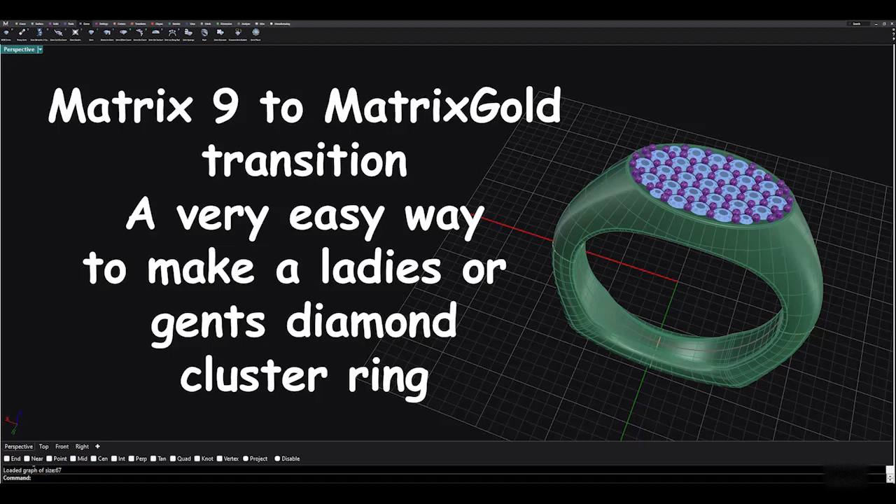Okay, here we are back inside MatrixGold.

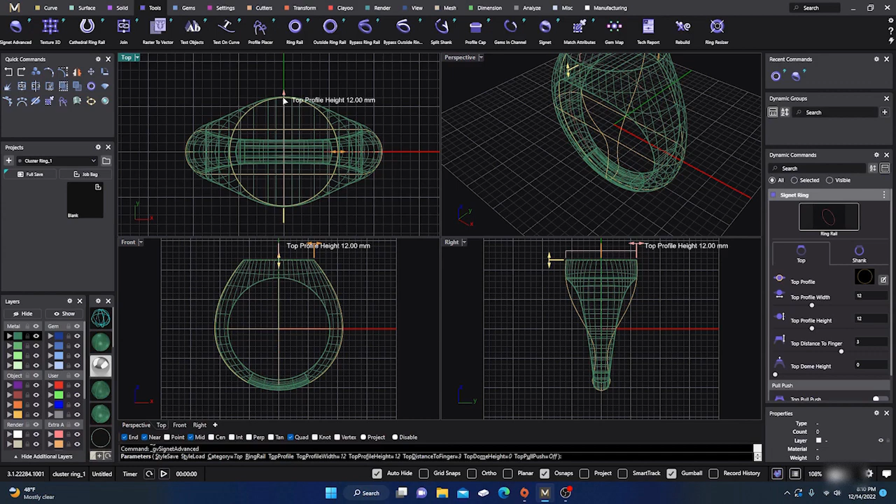So we're going to show how to make a cluster pave ring, ladies', so we'll go ahead and get started. We'll go to our tools, grab our ring rail, hit enter, and then we'll just go here to our signet ring. And for a lady, we're going to make it elongated with the finger. So we'll do something like this here.

So it's kind of going against the finger. They kind of like that thing. And we'll go to our shank and we'll bump that up holding down shift to 2.5, and we'll take this one to 2.5 as well. Maybe. There we go. Alright, so here we got this shape.

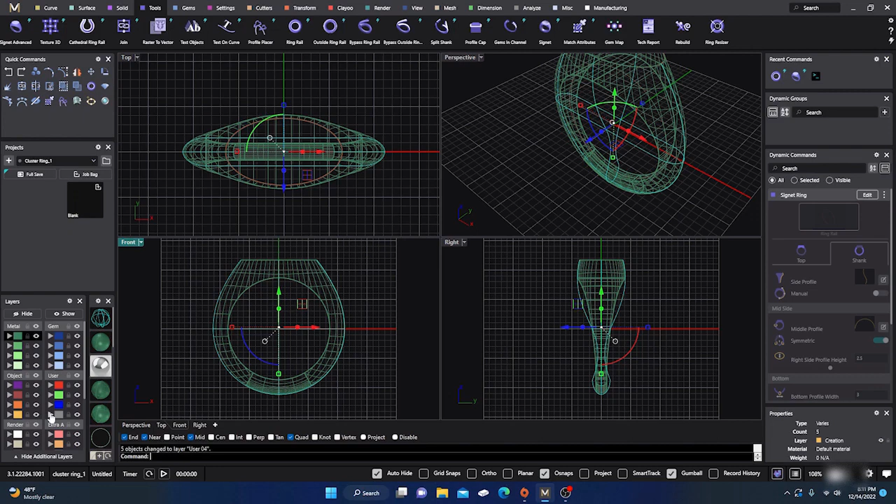Now I'm going to take my yellow right away, and I'm just going to take most of my yellow. I'm going to change this one to red, and then I'm going to take all my yellow, put it on gray, and hide it. Okay, so we have this. Alright, so let's give it some shading.

The first thing I'm going to do is go ahead and go to my solids, and well, actually there's two ways to do it. I'll do the real easy way first. We have our shape here, right? And we want to make a little dome there, so it's a little bit easier for wear and tear. So we'll go ahead and extract the surface. We'll pick this one here and hit enter. So we have this surface extracted.

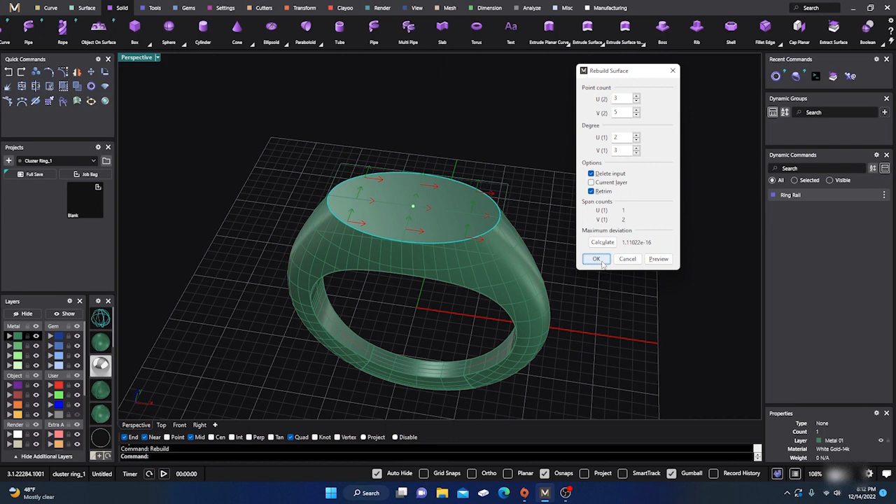Now we'll choose that surface and we'll type rebuild and hit enter, and we'll leave it degree 3, U 3 and V 5. And delete input and retrim. We'll just leave it right there, and we'll hit OK. And now we'll take that surface, turn on our points, select these points in the center holding down shift, and then drag that surface down. So now we have a little concave surface, right?

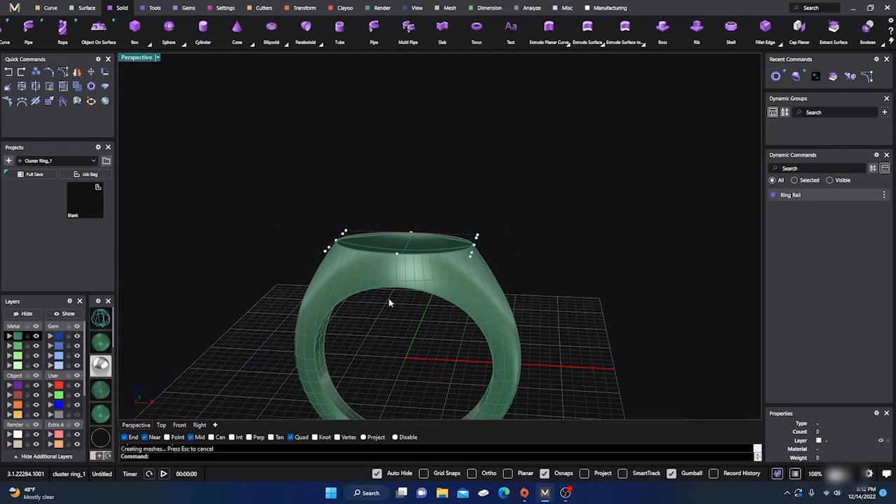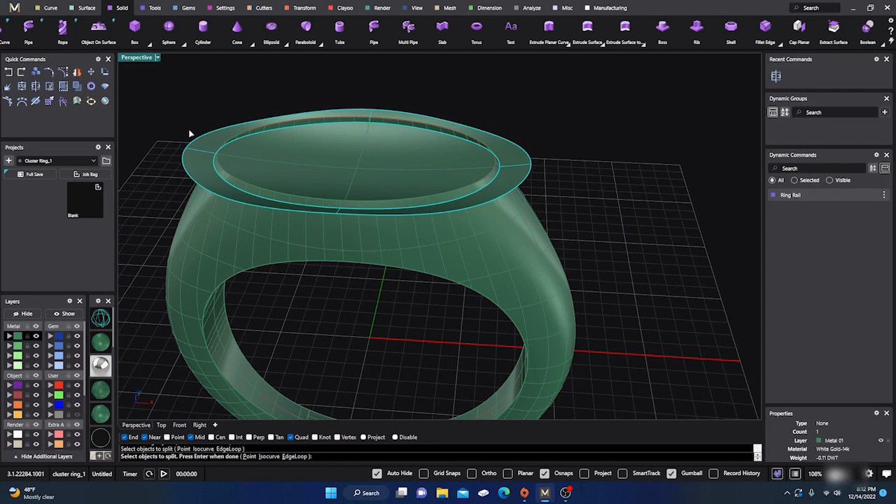This will work out really good, but there's another way we'll show you. Then you just take that surface because it pulled away, and we'll just grow it out, then grab that, do a split with our ring, hit enter, and then grab our ring and do a split with our surface there and hit enter, and then delete that, delete that. Oh. Okay, so we'll take our surface, split with this surface, hit enter. Now we should be able to delete that surface, and there we go.

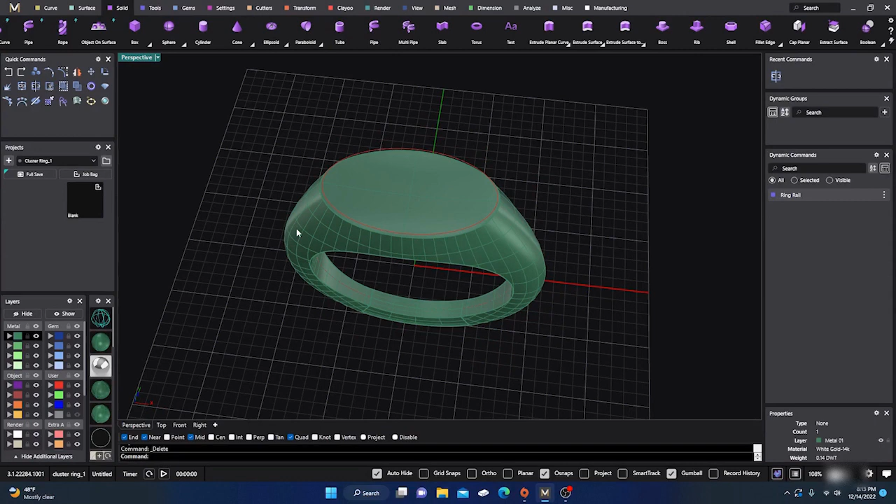So if you take all your green, join it back together again, now you have a closed polysurface with an indentation there. So that'll work, and then all you have to do is go back, extract that surface again, hit enter. And it's extracted. Let's change it to another color. Go to our top view, click on that surface, go to our gems, go to pave builder, and you can start playing around with it from here.

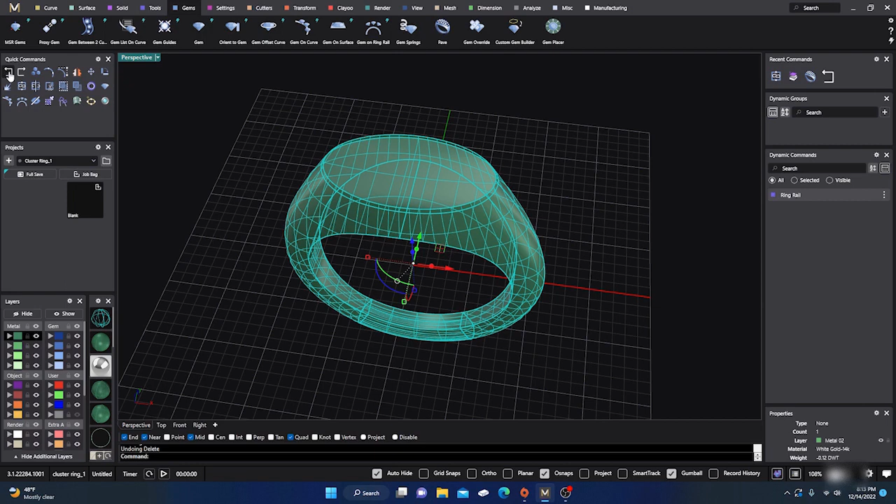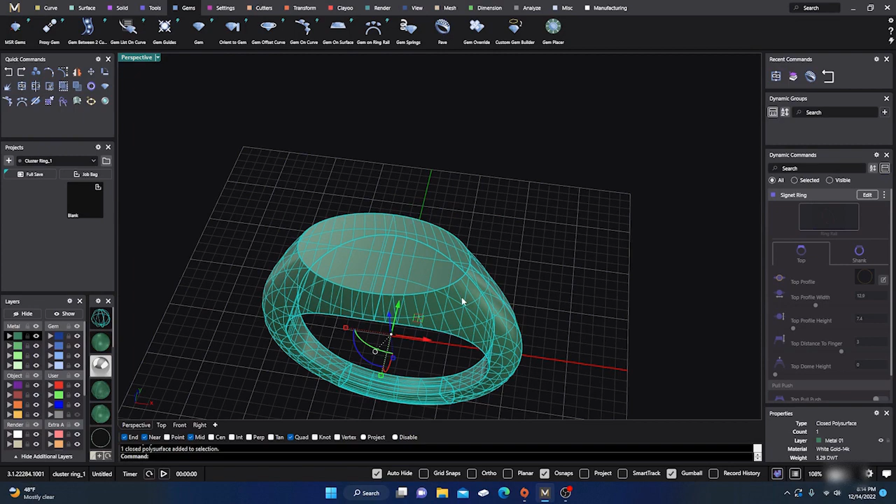But we're going to show a little bit different way as well, so you can get a different idea. So let's go back to where everything's back the way it was. Let's go back one more. Okay, and one more. So everything's joined together again. Okay, closed polysurface. So we're back to our original ring before we started extracting stuff.

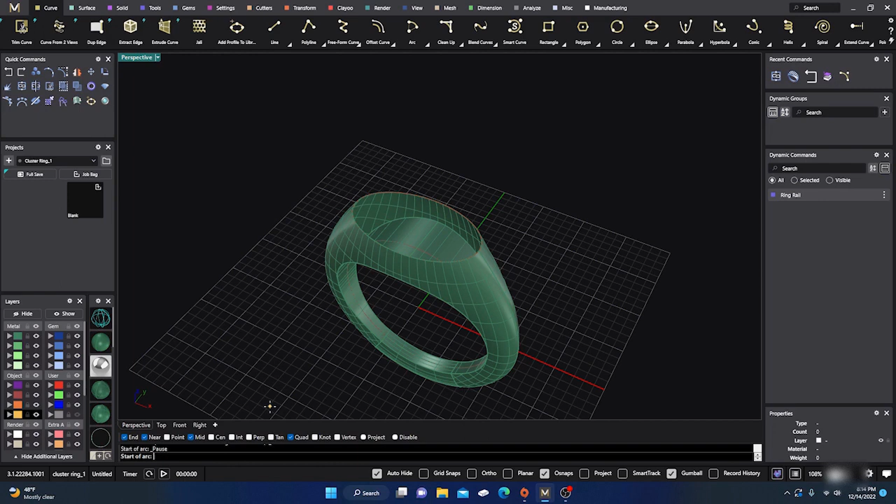Now here, again, we do want to extract the surface here, hit enter, but this time we're just going to delete it. Then you can go to your curve, go to your arc direction, and we'll turn that to yellow. We'll go from this quad to this quad, go to our right view so we can get a good look at it, and we want to curve it down, and we'll go back to our perspective.

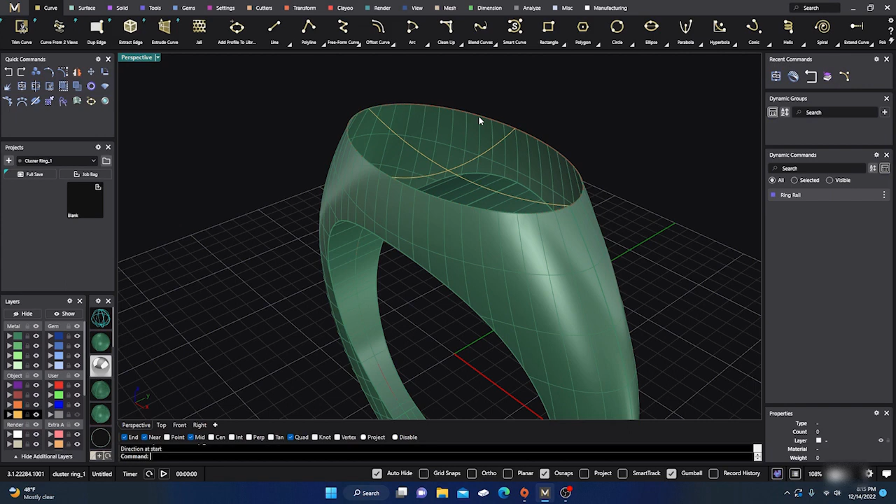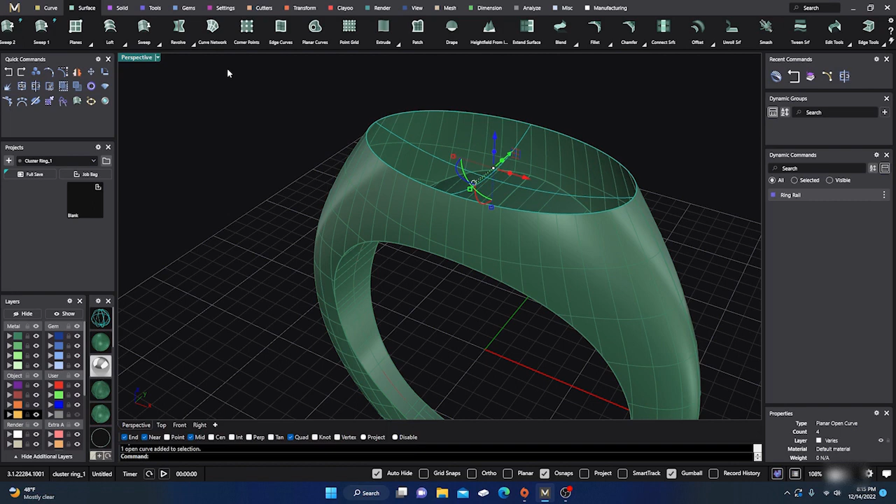We'll grab the curve here, go to this quad here, this quad over here. This time we'll go to the front view and give it a little depth in, and then we need to take that red curve and split it with this curve here and hit enter. So this should be two curves, which it is. And now we're going to take this red curve, this red curve on the other side, and this yellow curve, and go to surface and do a curve network.

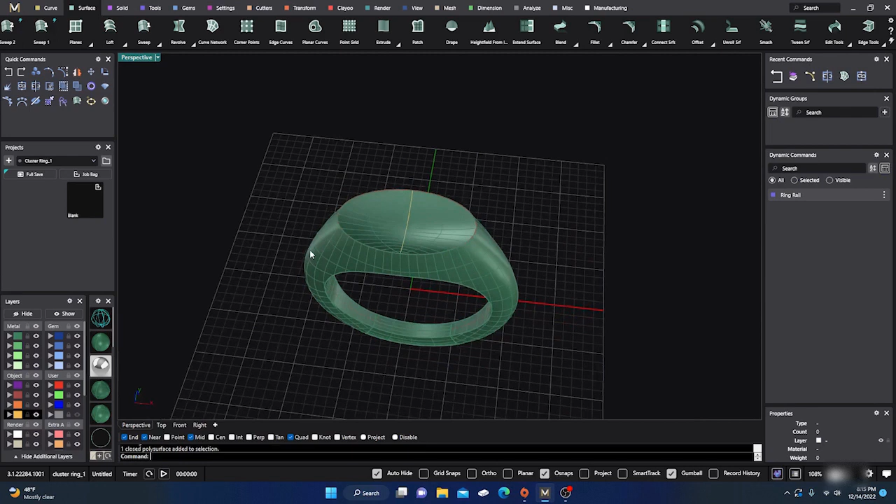And there's our surface. And we'll hit OK. Okay, so now we have an indented surface, right? And if you were to take that and take this and join them together, you would have a closed polysurface. Okay, so we're back to where we were. We're going to take that red, turn that to gray. We're going to take that yellow, turn that to gray. We don't want it anymore.

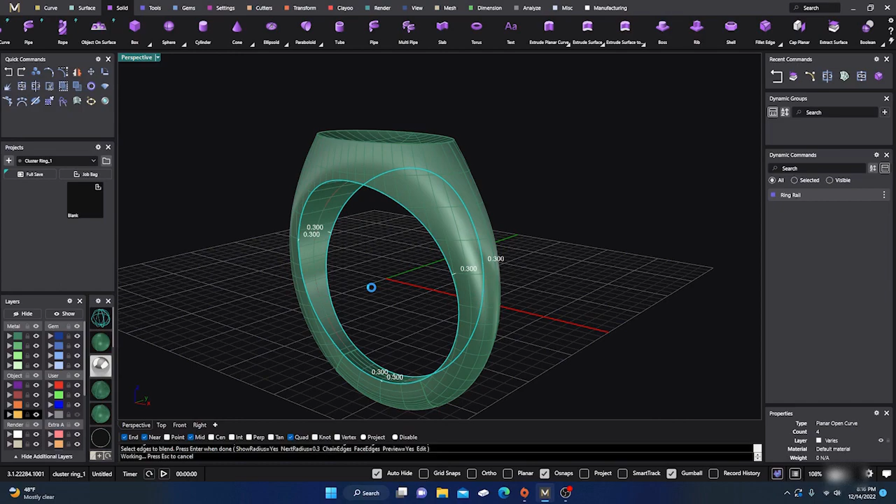Now we're going to do a little manipulation first. I don't like those edges and that edge up there, right? So we're going to go to our solids, we'll go to Fillet, blend edge, and we'll select this edge, this edge, this one, this one, this one, and this one. And 0.3 should be okay, and we'll hit enter. Give us a little preview, make sure it's what we want. Yeah, it's okay, and then hit enter.

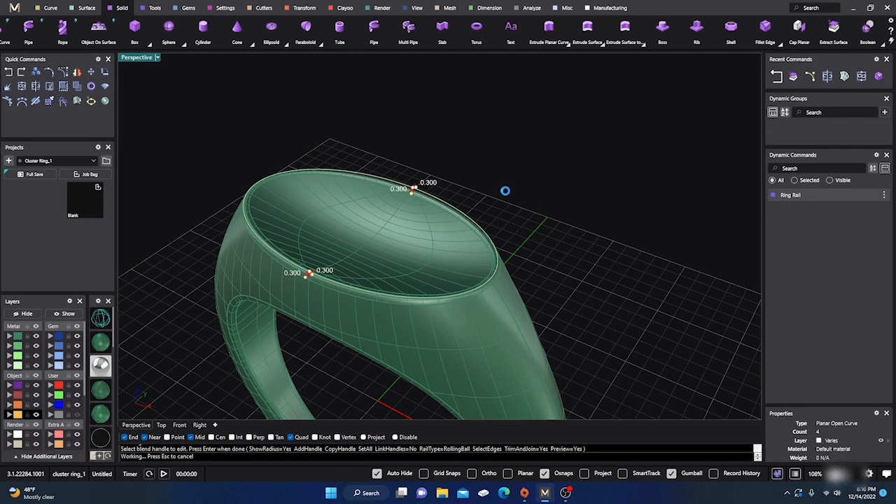Okay, and then we're going to summon that command and do it with our edge at our top right here. And 0.3 should be fine too. And hit enter. And enter. Okay, so we want to take this, make sure it's a solid. And it says open surface. So let's go to our analyze, show naked edges, and down here, is that the only place? It looks like it. Yeah, down here there's some naked edges, no big deal.

So let's kind of zoom in here, see what we got going on. And I'll hold down shift, drag it over. Okay, we'll go to our edge tool. We'll hit join two naked edges. We'll grab this one and hit yes. Okay, and then we'll come over to this side, do the same thing. We'll grab this one and then this one and hit yes, and then we'll go around to the other side here and do the same thing.

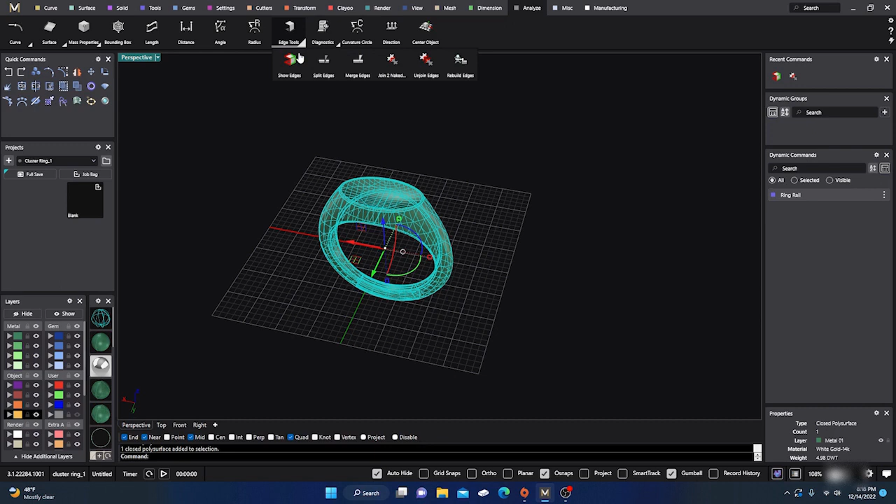Right click, recall that command. Right click, click on 1, 2, yes, and we'll go to our last one here. Right click, 1, 2, yes, and we'll click on our ring, closed polysurface. Okay, so we should be good. Let's just run that command again just to make sure. Found 37 edges, total no naked. Okay, so we're good. So everything is solid, or it should be.

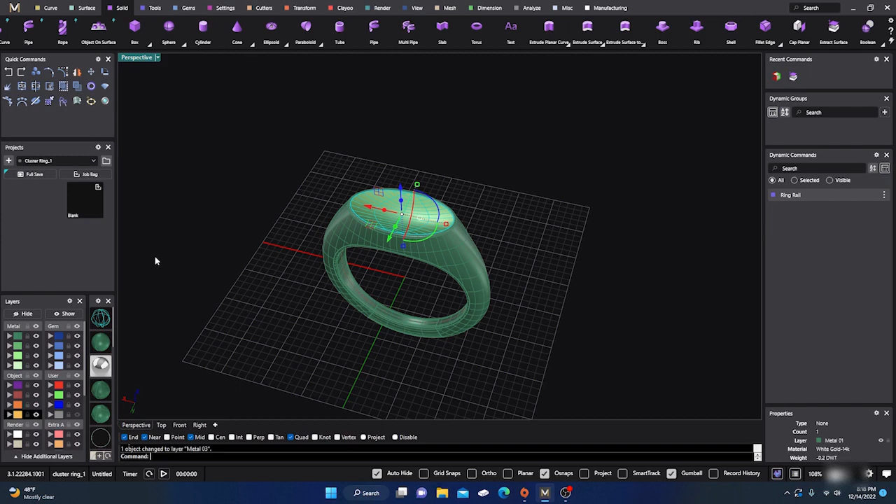So now we want to extract this surface. Go to our solids and scroll down, extract surface. That's the surface here. Hit enter, and it should be extracted, and we'll change it to a little bit lighter color. Then we'll go to our top view and we'll start putting some stones on there, pave. So let's go to our gems, pave builder, select our surface, hit enter, and here we can start manipulating our stones. So let's go a little larger, see what they look like.

You can play around with this for a while. I'm not going to play around too long. Let's go a little bit smaller. Okay, that looks good. A little bit larger. A little bit larger. Smaller. You can play around with it, whatever you like. I would take my time and find the best one. Distance between stones, let's drop that down. 0.15, and let's take this up. It's kind of interesting. Let's take it down. Okay, well, you can play around, of course, but we'll just keep moving forward. I'll accept that.

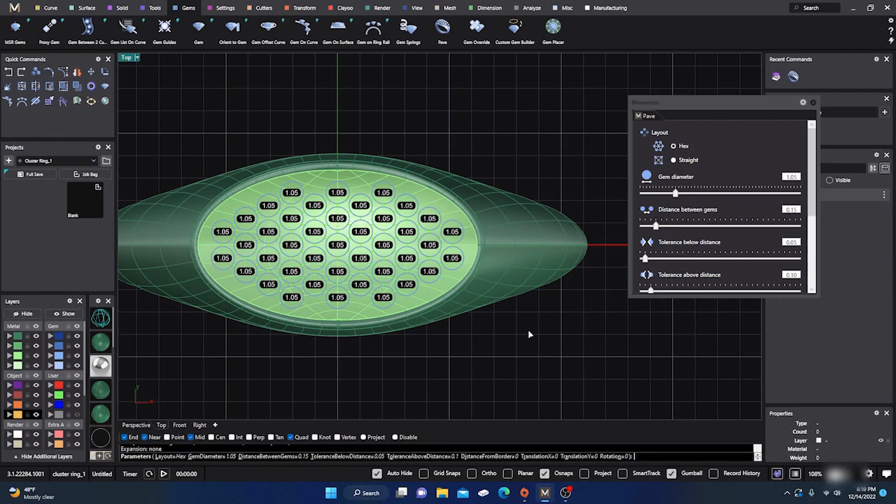And now we have some spaces here that we kind of want to fill in, right? So let's go to gem springs. Let's select our gems, hit enter, and we'll select our mesh and hit enter. And let's see here. Okay. Let's turn both of them on and add a gem. Okay, that's too big, right? So all directions, because we want to get this one here. That's a little too big, so let's just go to 0.9, see what that looks like. Yeah, that looks good. We'll click on that one there. Let's drop it down to our smallest. I think it's at 0.8.

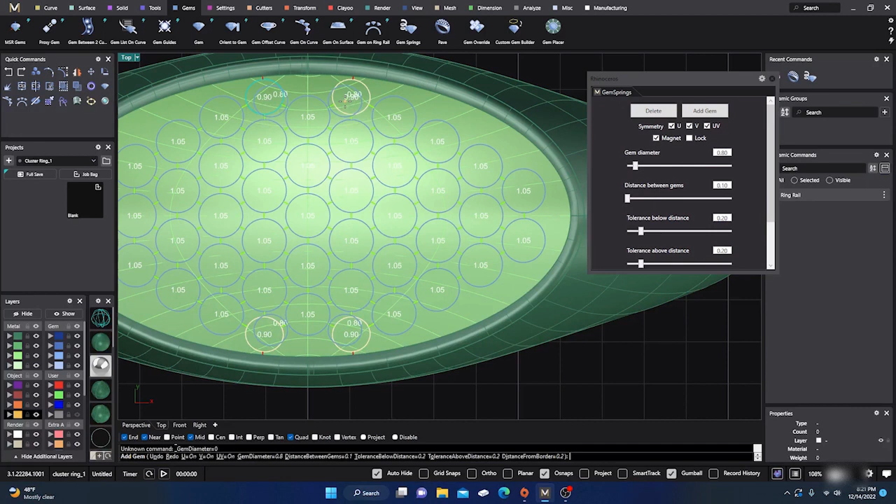I think 0.8. Can I get those in there? Probably better to put a prong or something there, cover it up. Let's see, let's do a point. Is it 0.8? No? Okay, let's type in 0.8. 0.08 or 8? 8. Enter. Okay. Yeah, still a little. Here maybe. Let's go ahead and add those in there. A little too close. Okay, so we'll just take this and hit enter. Whoops. Let's undo that last one. And we'll click on our outside and hit enter. So they all should be grouped together.

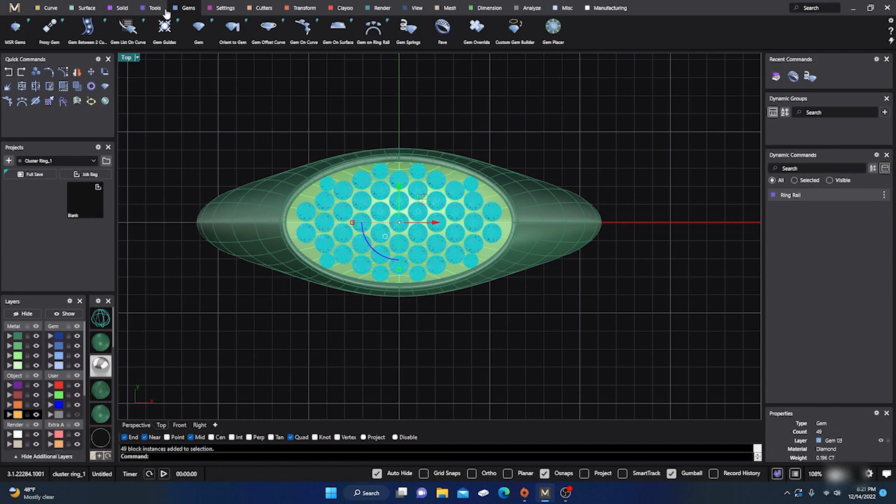So let's go to our settings, pave prongs, take a look, select our surface here, and it puts our prongs out there. Not too bad. Let's go to perspective, check our height.

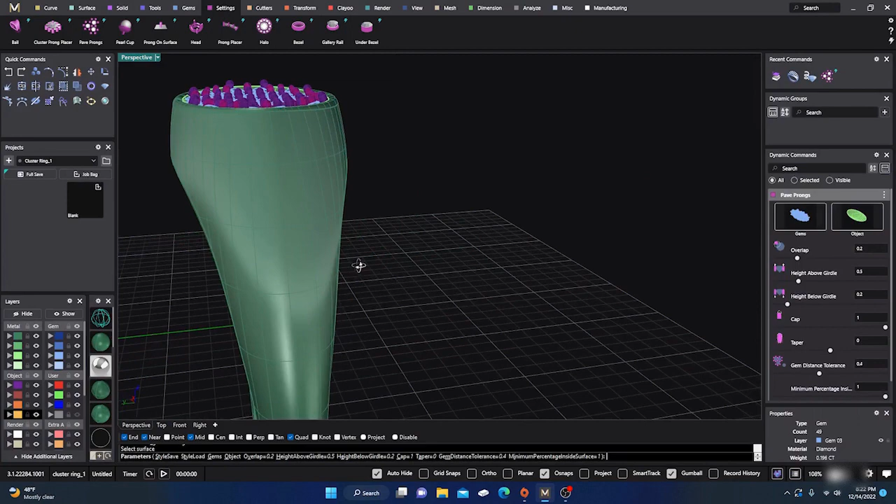Actually, it's not too bad. We'll go ahead and take that. Go to our top, and we'll hit enter. Yeah, it's really not that bad. This one here could use another prong, but we were going to put prongs in it anyway.

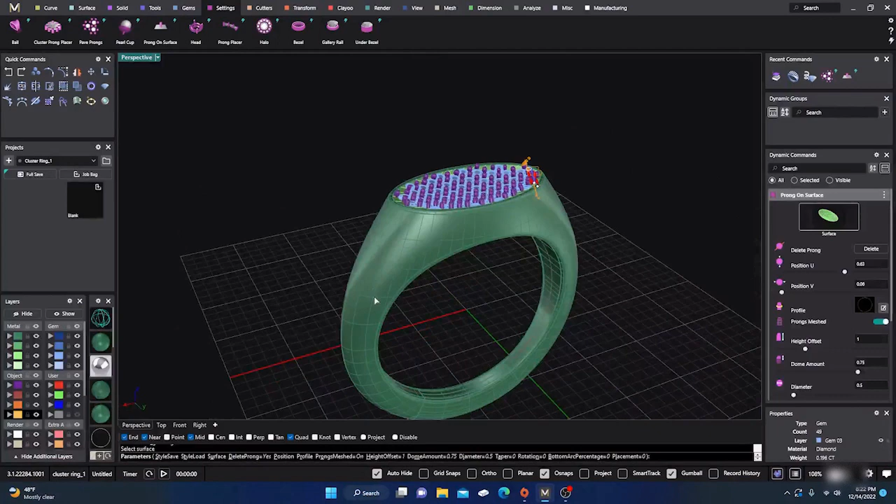So we'll go to our surface, or prongs on surface rather, and select our surface. It's going to add a prong right away, so I know I want a prong there, so I'll select there. And of course it puts a monster prong out there. We'll drag it down to about the same height as the others.

Kind of go back to our top view, and let's see, we want to put another one like right in here, maybe another one right in here. We'll put two, one here and one here, and this thing here looks a little, well, it's only at 0.8, so those two prongs should hold it fine actually.

We'll go ahead and add one here, add one here, and add two here, maybe 1, 2. That's the second one over there. Okay, and I want to go back because I do not want those meshed. I do not want them meshed.

Okay, so here, let's see, I should be able to mirror it and it should be fine. So let's hit enter. Let's take these prongs and let's mirror them, F4 over to, okay, well, here, and I have two here, so I want to ungroup these, take one of them and just delete it.

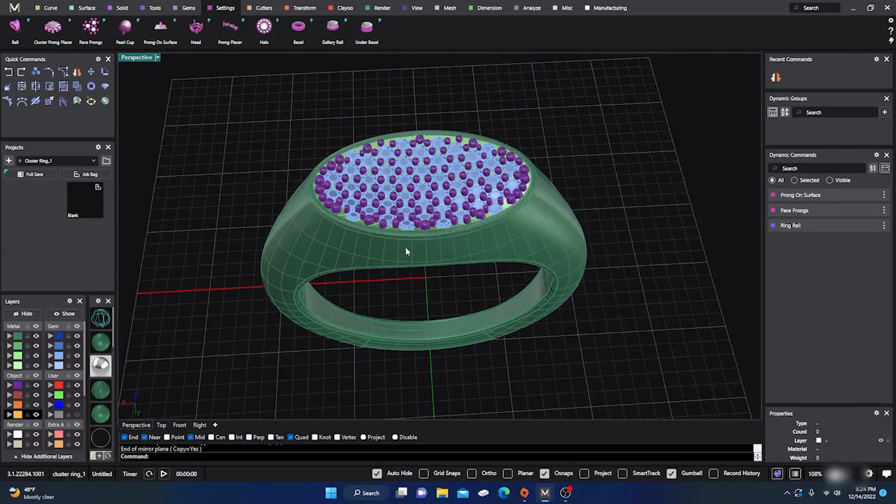And now I want to take that one there, ungroup it, and mirror it, F4, or yeah, center. Hold down shift and hit enter. So there we go, now we have a nice little cluster ring for a lady, right? And you can do this with gents rings and everything. It's just very easy, very quick, and you get a nice little cluster ring going together.

It looks pretty decent. We can do a render here real quick. Let's go ahead. Materials, diamond, white gold diamond. Okay, it's not going to give us. We'll turn on MatrixGold. It's not going to give us our diamonds. Wonder why. Okay, we'll just select all blue.

Go to our diamonds down here. Hit apply. And let's do a render real quick. See what it looks like. Turn on our denoiser. Yeah, diamonds don't look real good. But anyway, I don't want to sit here and play with it and waste your time.

So it's just a quick, real easy way to get a nice little indentated dome cluster ring for females or males. It doesn't matter. You do the same thing with a gents ring. You would go to your tools, go to your ring rail, bump your ring rail up, of course. Go to like around 11 or something, hit enter, just go back to your cluster ring or signet ring, and then you can kind of make the shape you want.

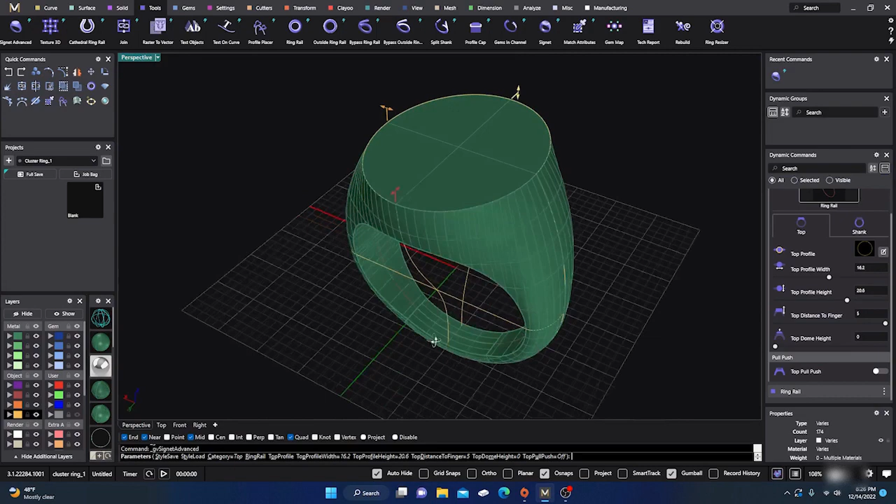Let's go to the top. So you've probably seen a lot of these kind of rings, they seem to be very popular with the men, where it's an elongated oval type design, and you can manipulate this. You can change the profiles. That's the top one. Shank profiles to different ones. You can do all kind of stuff with that. And then you do the exact same thing.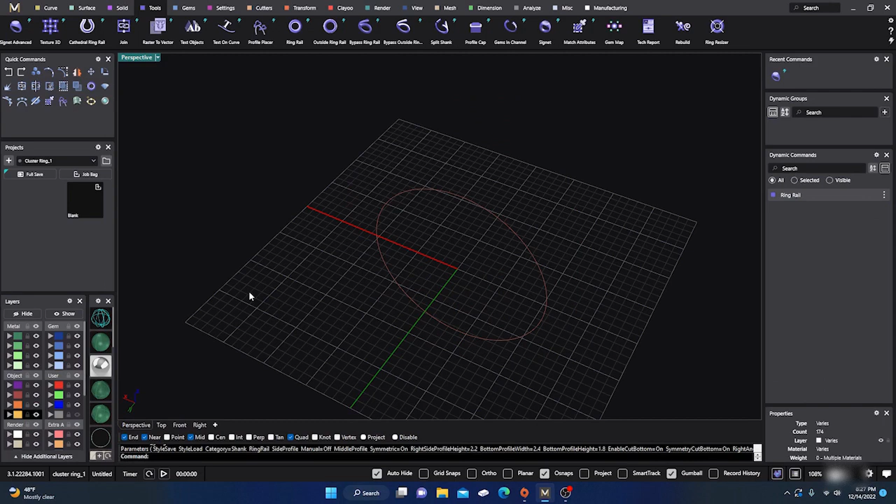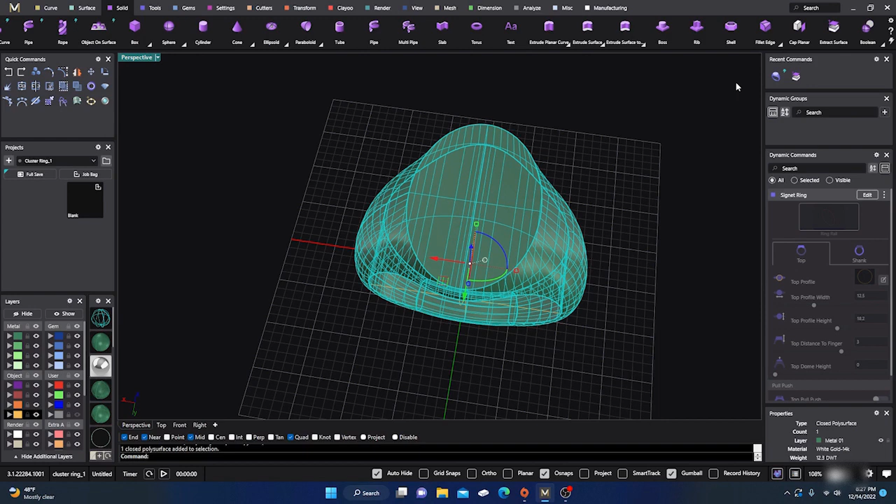You could sit here, grow it out, something like that. Maybe make it a little bit wider. Hit enter. Then you just take that surface, extract it. Extract that surface, hit enter, extract that surface, hit enter, and now you can just do a rebuild.

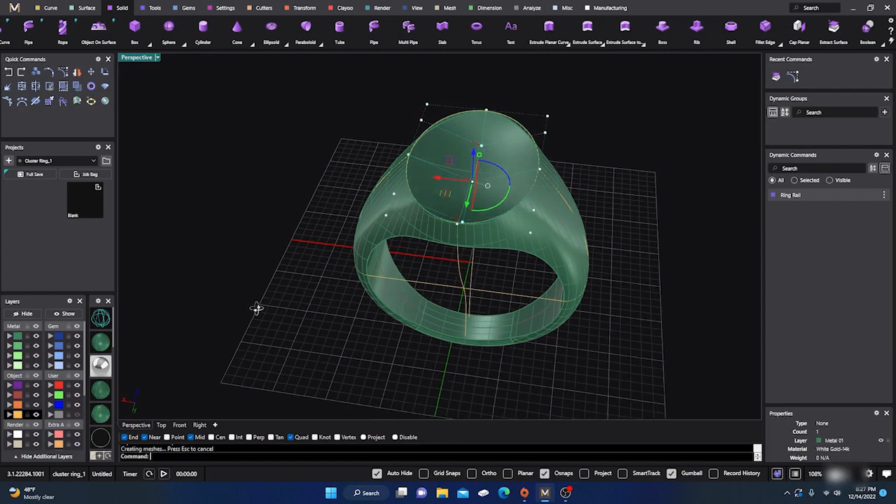This surface, hit enter, and you can pick your points, and just select 1, 2, 3. Drag it down. It's got a nice little concave surface. Hit enter. Get rid of your points. Take your surface. Hold down shift. Drag it out. Do your splitting. Take this. Split with this.

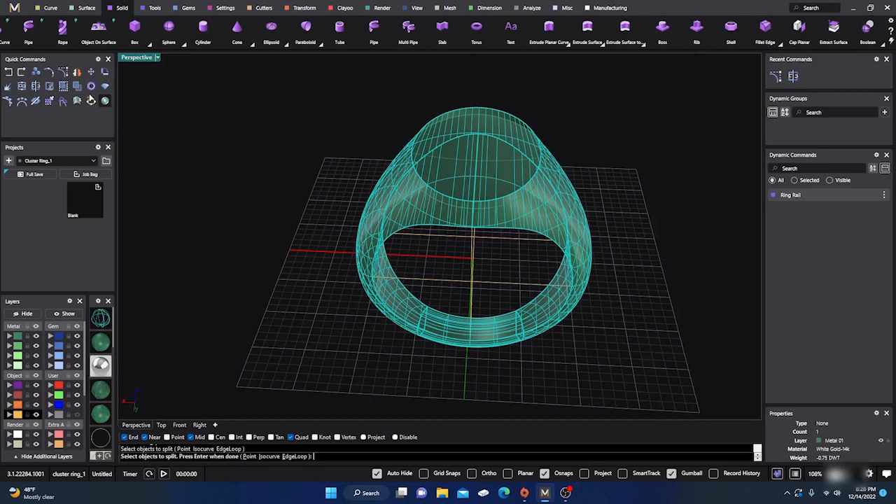Enter. Delete that. Take this and split with this. Enter. One more time, take this, enter, and then just get rid of that surface. And then hide all your yellow, take all your yellow, turn it off, and then just put your gems on there.

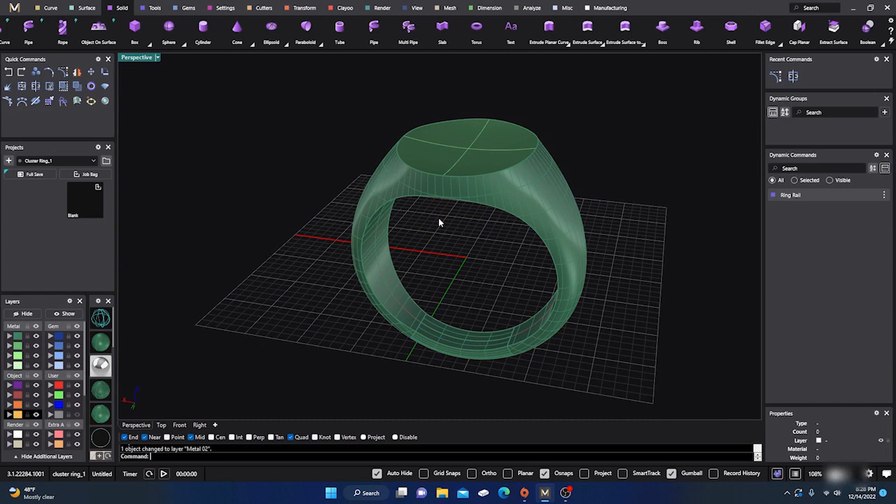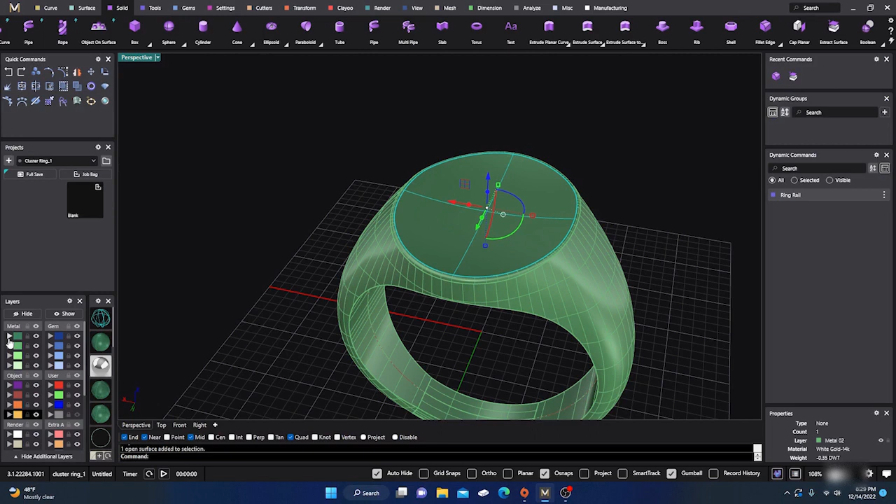You want to make sure you join them together, and then do your fillet edge first, just to make that edge not so sharp, and then you can do it there, of course, too. And then extract that surface again. Yeah, and change it to color. Go to your top view, and just go to your gems and do your pave thing. Oh wow, cool. And then you can make a nice little indentated cluster ring.

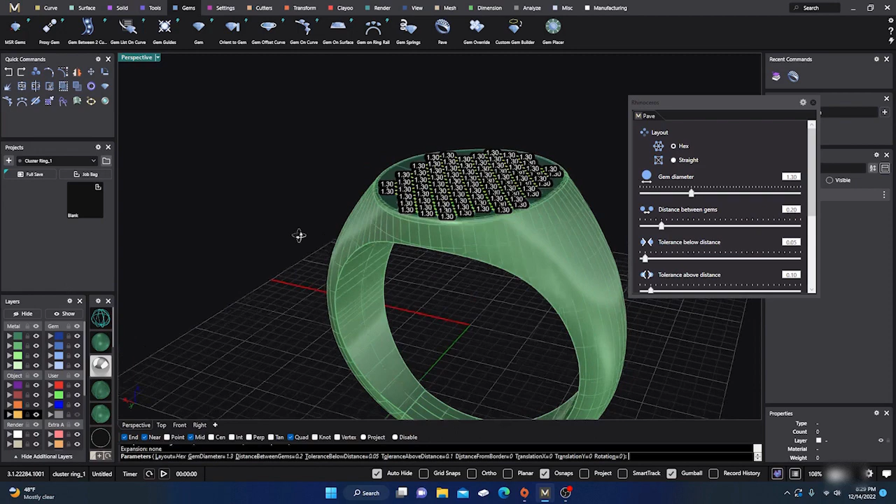Or you could put the curves in there, arc curves, and do a network surface to get a little bit different surface. But hope you enjoyed the video. Hope it was helpful and useful. Very easy way to make a cluster ring.